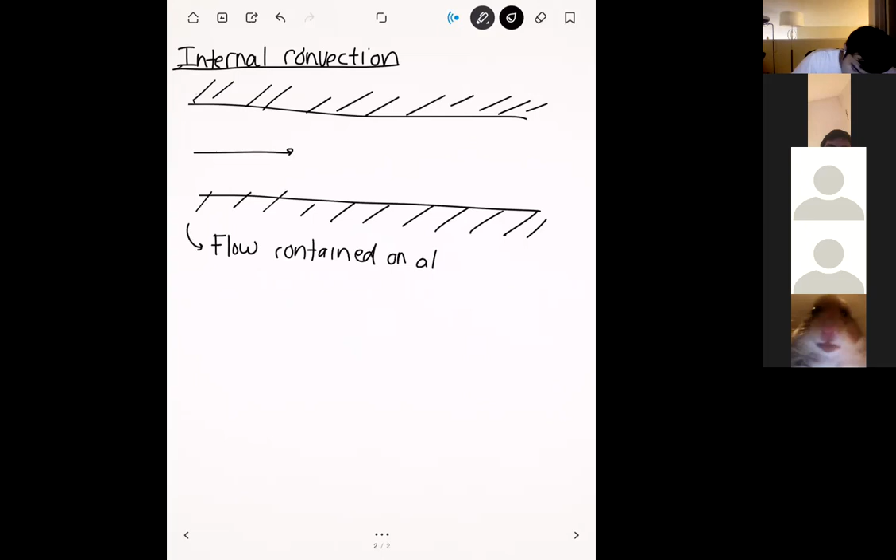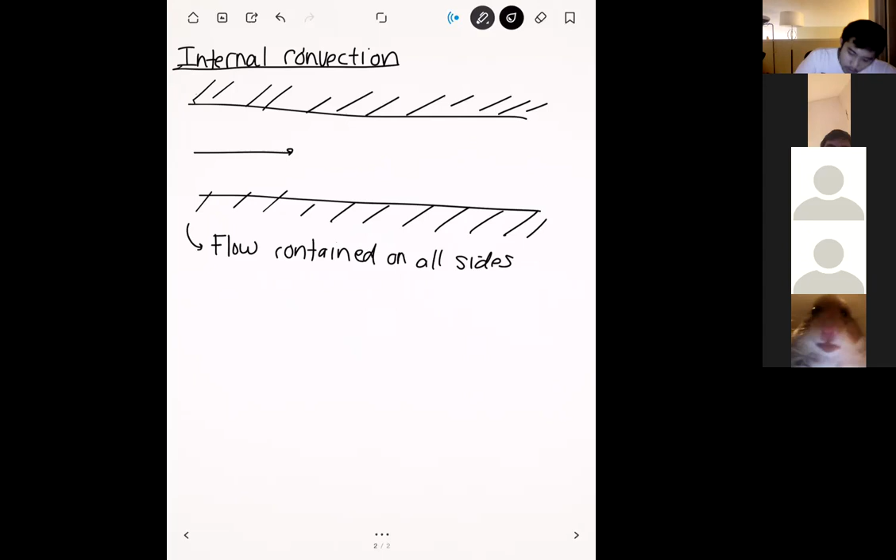And so the biggest difference that we saw is that when we're formulating our amount of convection heat transfer, we do it in terms of the mean temperature instead of the free stream, right? And so when we write out Newton's law of cooling, we have Q is equal to hA(Ts minus T infinity), right? And so this is what we usually have for convection, but what we said for internal convection was that instead of T infinity right here, what we have instead is Tm.

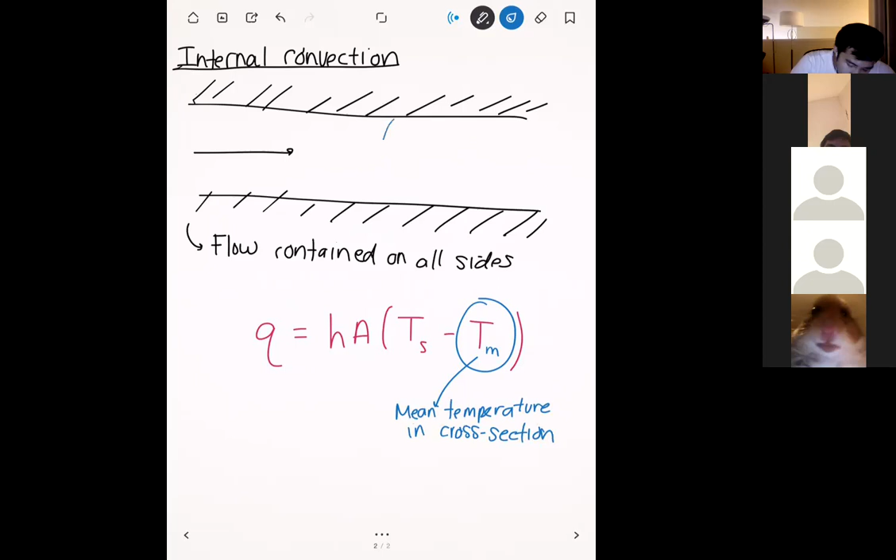Okay. And what's unique about this Tm is that this is basically the mean temperature in the cross section. Okay. And so basically what that means is that, say that we have a circular pipe here. And so if I draw kind of a cross section just like that, Tm would basically just be the average temperature across that cross section, okay?

And at first, this might just seem like just a notational change. And so instead of an infinity sign, what we have is an M. But what we said was that, because the flow is confined here, and because we have just a finite amount of fluid, this Tm is going to evolve going down the pipe. Or in other words, it's going to change. And the reason for that is because we have such a confined space, as heat gets exchanged between the fluid and the walls, right?

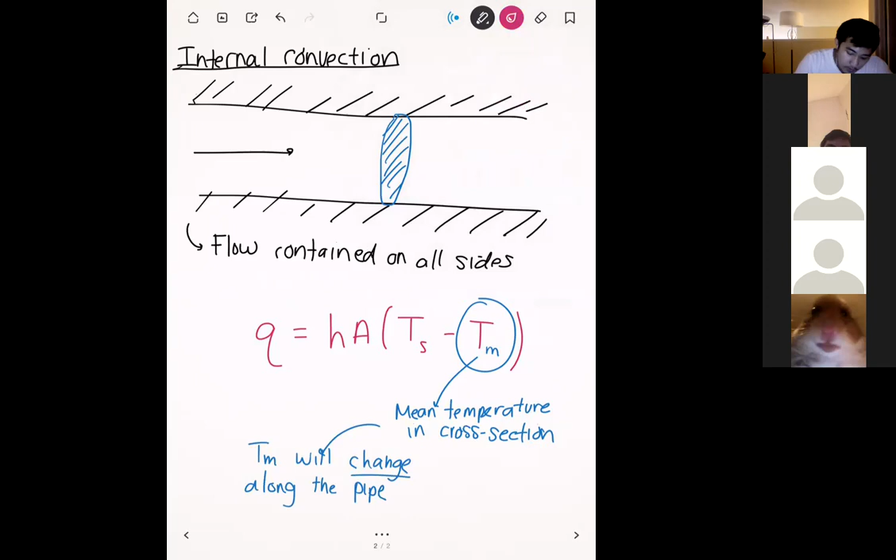So let's say that we have heat coming out here, okay? And so as heat is lost, that actually affects the overall internal energy of the system. And it's actually pretty significant because we have just a small amount of fluid there. And so the first thing we're going to do today is talk about a way that we can solve for expressions for Tm. And so what we are going to get are the mean temperatures as a function of x, where x is the direction down the length of the tube, okay?

And so basically what we'll see, and we'll have to apply some assumptions in order to solve for this, because it's a little bit difficult to solve otherwise, is that under some assumptions, we'll be able to solve for how the mean temperature changes along the length of the pipe. All right. And one last thing that I want to remind you of from last time is that even though our mean temperature here is changing, our convection coefficient h is actually going to be a constant. This point won't come up until later, but it's good to note it right now.

And so what you'll see later on is that our expressions for the Nusselt number are going to be extremely simple, a lot simpler than external convection. For internal convection, the difficulty is different than external convection, because for external convection, we had those sophisticated, complicated expressions for the Nusselt number. For internal convection, our Nusselt number correlations will be really simple, but the mean temperature will be a lot more difficult to calculate by comparison. Okay. Any questions on this? This is just kind of a recap from last time.

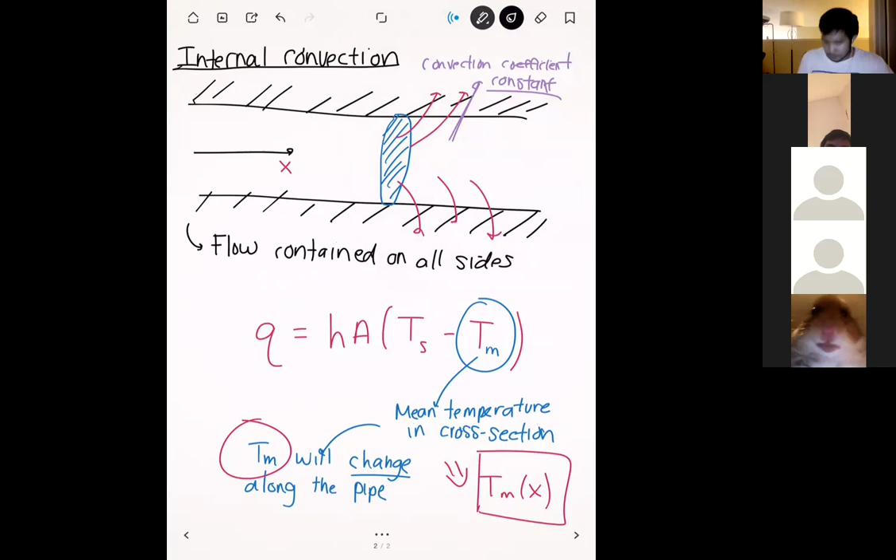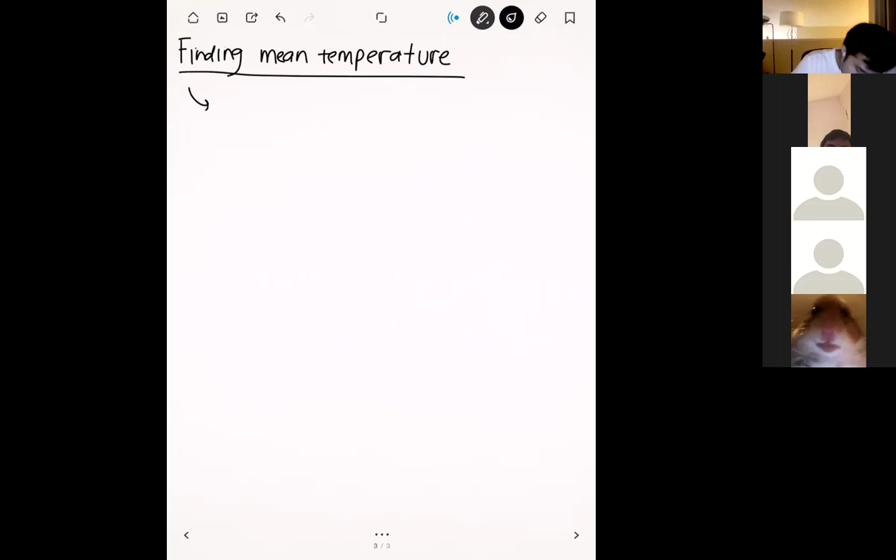Okay. All right. And so let's go about determining an expression for the mean temperature. Basically what we want to determine is an expression for Tm as a function of x. Or in other words, how the mean temperature evolves as we travel along the pipe.

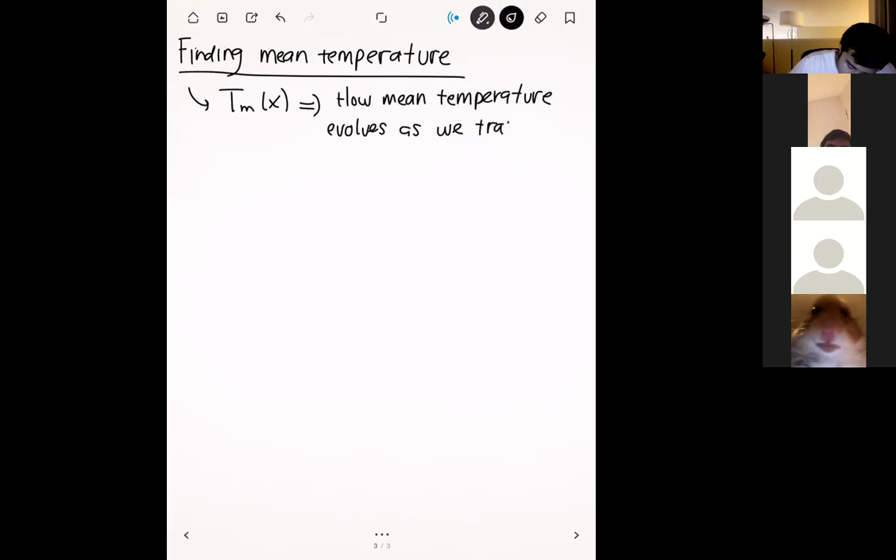Okay. And so for this, I'm going to do just a short derivation. Normally I don't like doing these, but this one's pretty short. So I'm going to draw a pipe that we usually have, and then let me draw a control volume, albeit a very tiny control volume. And so remember, control volumes are just tiny regions in space in which we can form our conservation laws. And so in this case we're going to form a conservation of energy on this tiny parcel of fluid.

Okay. And so let me define some things in this diagram here. So first thing we're going to have is, of course, since it's convection, we're going to have a flow of fluid down there. So our fluid's going to be moving. And the way I'm going to characterize that fluid is with m dot, where m dot right here is going to be the mass flow rate of the fluid going down a pipe.

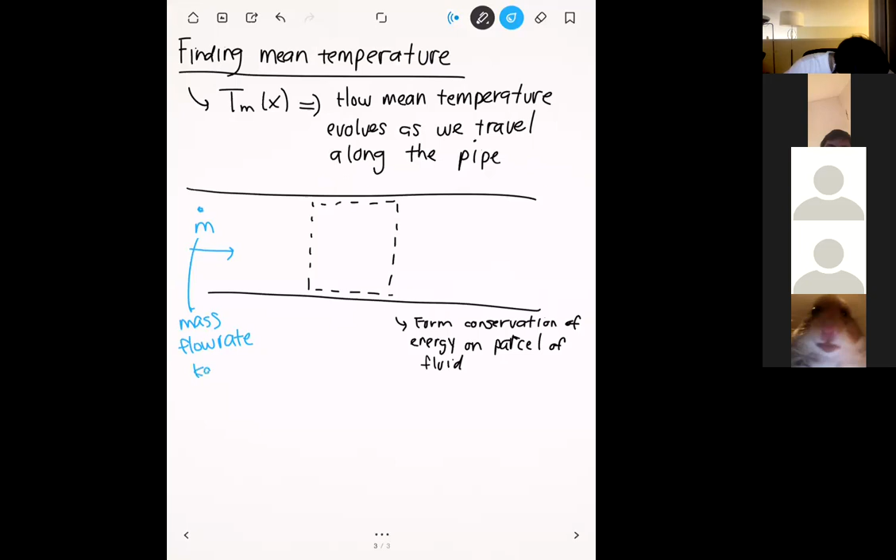Okay. And so the units for mass flow rate are going to be mass over time. And so typical SI units for this would be kilograms per second. Okay. I don't believe we've defined fluid flow in terms of mass flow rate before, so I wanted to make sure I define that.

All right. So let's define the amount of heat that's coming in. We'll assume that the only heat transfer that we're going to consider is from convection. And so let's assume that convection goes into the fluid. And I'll call that amount of convection heat transfer dq conv.

And so the last thing that we're going to need is the length of this parcel. So let's define this length right here to be dx. I'm using dq and dx here just to denote that this is a tiny parcel. So tiny that, I'm drawing it as a square here, but in reality it's something that's really, really small.

And so when we apply conservation of energy, basically what we're saying is that when we have convection heat transfer into this fluid, it's going to cause a change in the mean temperature of the fluid. You can think of it almost as, when we heat up this little parcel of fluid, its internal energy is going to go up. And so what we can form from this is an equivalence, right?

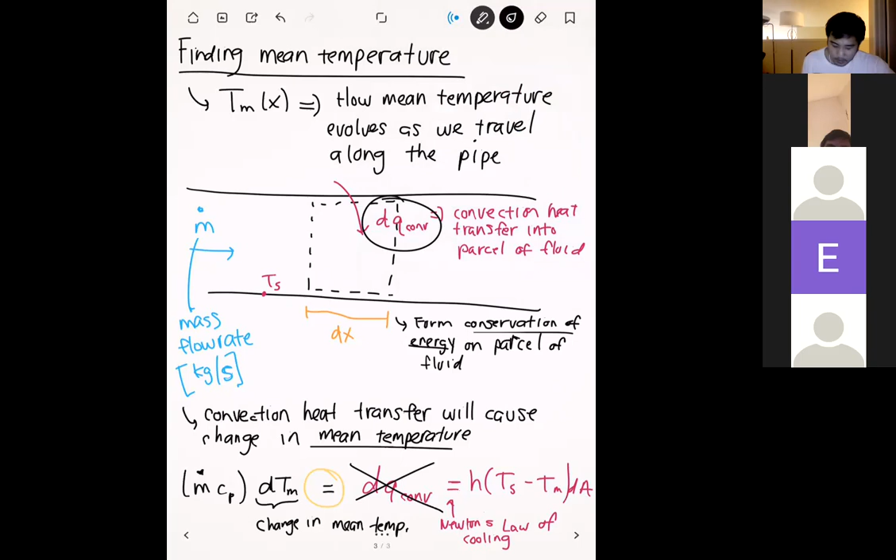All right. So let's work with just the leftmost expression here and the rightmost one. We're going to cut out the middleman and set this left-hand side equal to that right-hand side. So on one side of the equation, we have m dot Cp dTm is equal to h times Ts minus Tm times dA.

All right. And so from this expression, let's simplify dA a little bit. dA represents the surface area over our little parcel of fluid.

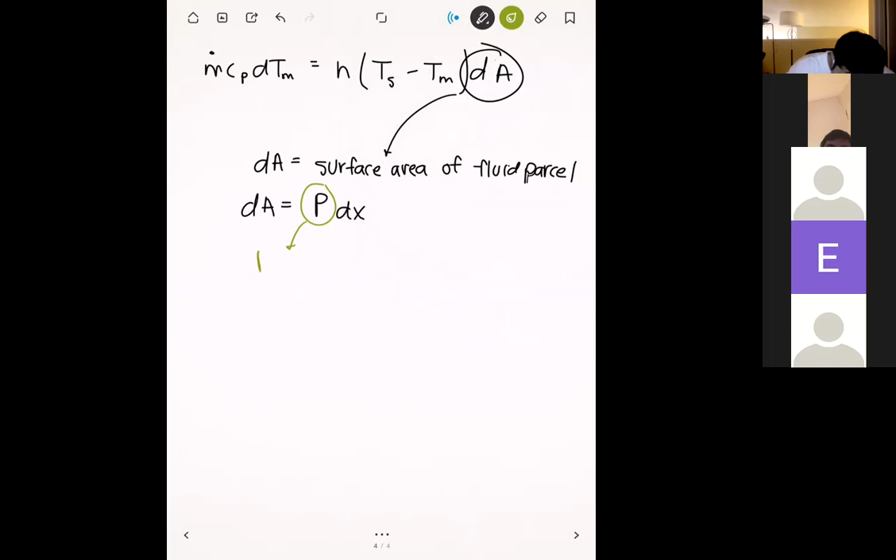And so another way that we can formulate this is we can say that dA is equal to P times dx, where P right here, hopefully this looks familiar from when we did our fin stuff. This P is just the perimeter around the parcel. And of course, dx is just the length of the fluid parcel. And so if we plug all that in, what we get is m dot Cp dTm is equal to H (Ts minus Tm) times P dx.

And then from here, what we can do is we can simplify this expression. We can do kind of like a pseudo derivative. I know this isn't how derivatives are born, but we'll suspend our imagination a little bit. The derivative stork fairy came, or whatever you want to say.

Okay, and so we'll divide both sides here by dx, and then we'll divide both sides by m dot Cp. So I'm going to take this whole expression, divide by dx times m dot Cp. And then what we get is kind of a deceptively simple differential equation here. The parcel is the box? Yes. So the parcel of fluid is basically just this box that I drew on the previous page. It's almost like an imaginary box that we're putting around a small parcel or a small amount of fluid.

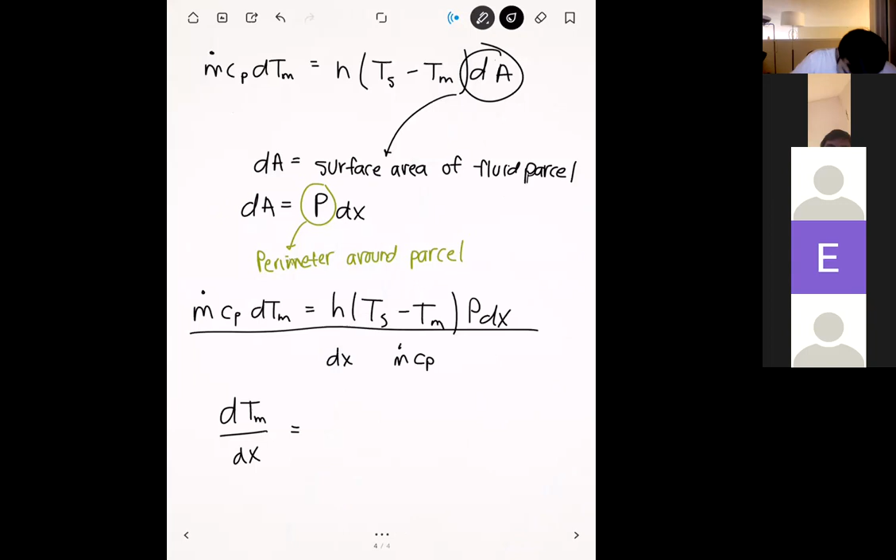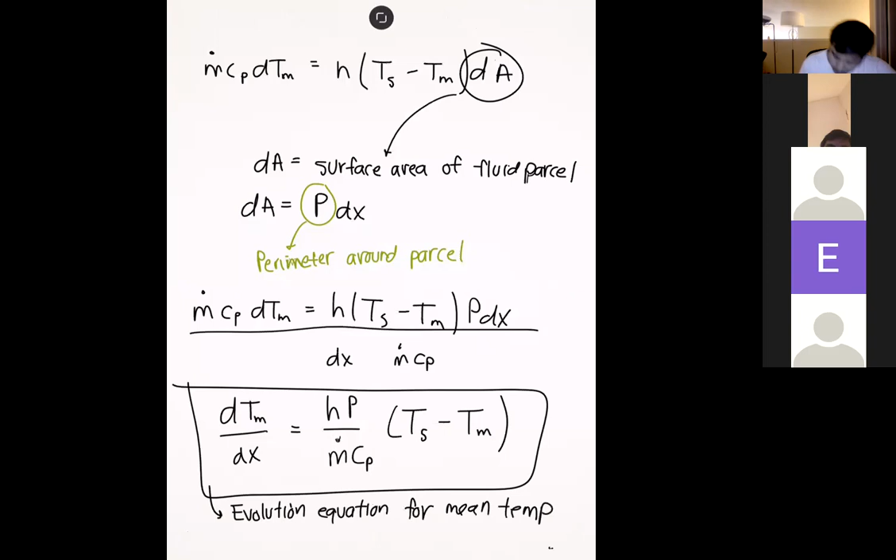And so we do that division and we end up with dTm/dx is equal to HP divided by m dot Cp times (Ts minus Tm). And so this equation right here, this is our evolution equation for the mean temperature. And so it looks not that bad. What we have is just a first order derivative, and on the right hand side, we have just some stuff there.

And so in order to solve for the mean temperature, all we have to do is solve this differential equation. But unfortunately, it's a lot easier said than done, because even though everything outside the parentheses, H, P, m dot, and Cp, are all constants, and we don't usually have to worry about those, what we have to worry about are these two: Ts and Tm. Remember, Ts is the temperature at the surface of our pipe, and Tm is our mean temperature that we're trying to solve for.

And so the reason this is more complicated than it seems is that Ts and Tm are both functions of x. So as we ride along in the pipe, both the mean temperature and the surface temperature are going to change. Since both are changing at the same time, we can't just straight up solve this equation for Tm. So we have to make some assumptions, and I'm going to show you how to solve this in two common situations that you'll find in practice. Any questions on this so far?

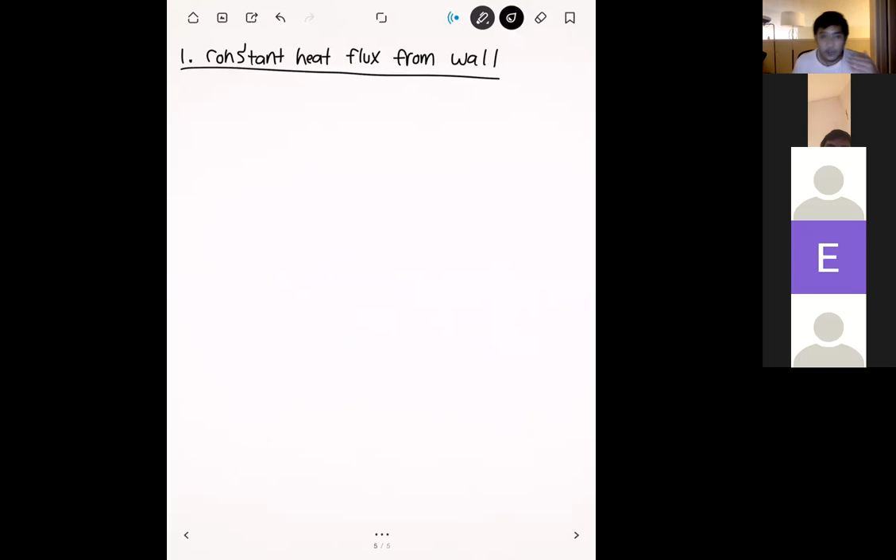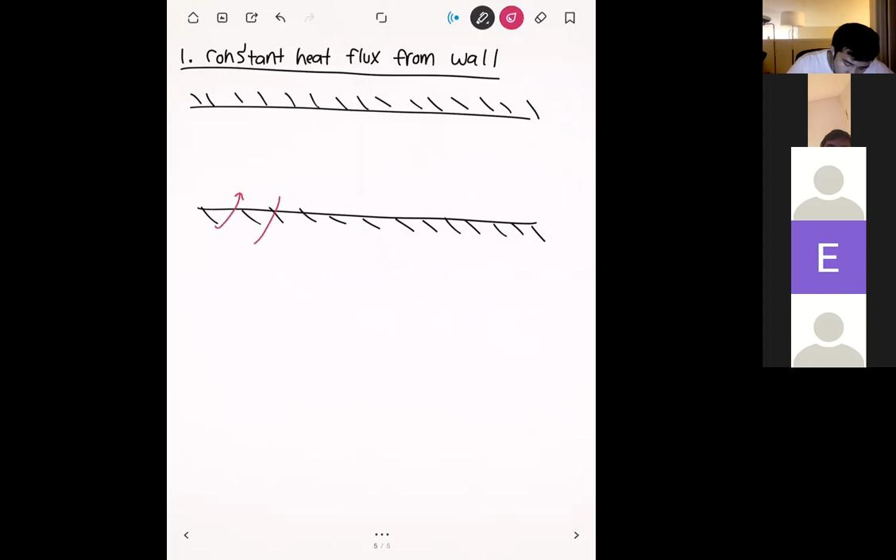All right, so let's go over some situations where we can actually solve this equation. The first situation is when we have constant heat flux coming from the wall. Physically, as we go along the vessel wall, we have a constant amount of heat transfer occurring from the wall. So we have our pipe right here, and if we measure the heat transfer coming from the wall into the fluid, it's going to be constant. All the red arrows represent the heat transfer from the walls into the fluid.

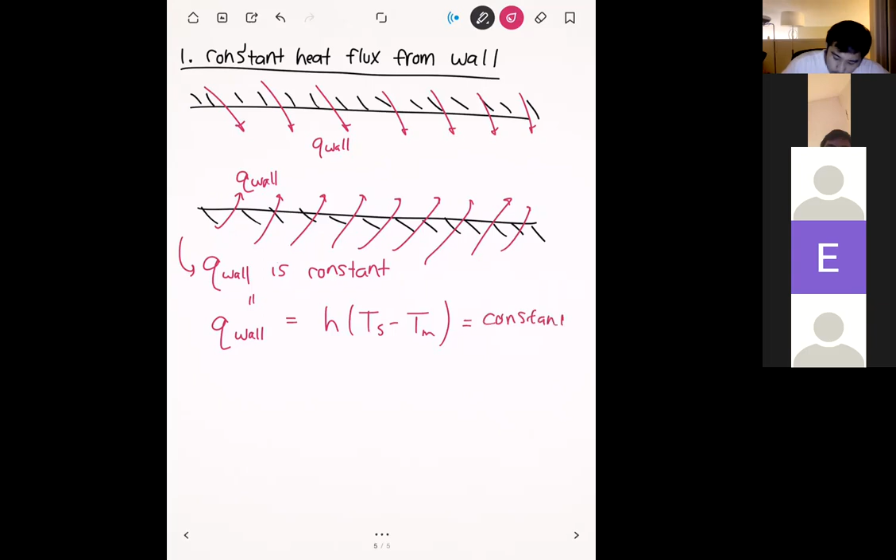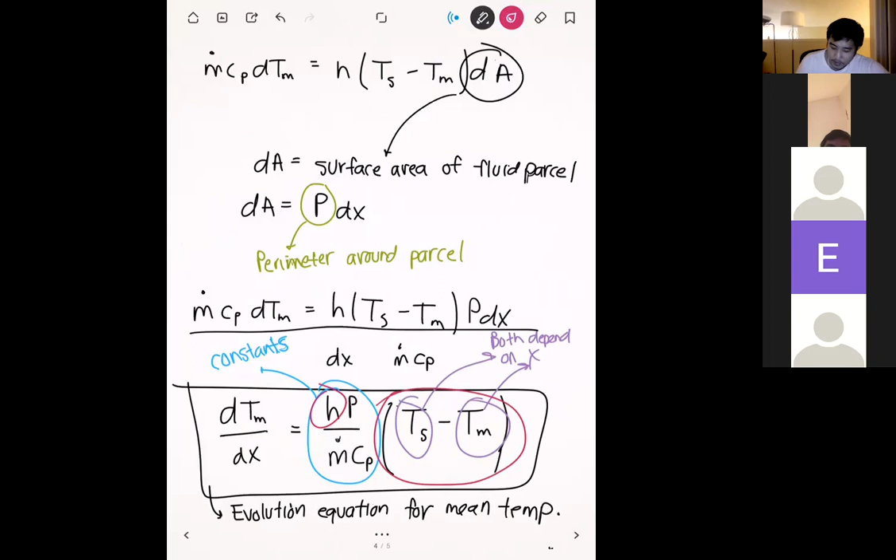And so in this situation, Q wall is constant. Another way we can express Q wall is in terms of the heat flux: it's equal to H times (Ts minus Tm), because that's just the convection heat transfer from the wall into the fluid in terms of flux. The area is missing because I put it in flux form, that's why I have the double primes. And this has to be constant under this assumption. So relating this back to our previous equation, we can take H times (Ts minus Tm) and set it equal to Q wall.

All right. And so if we plug that into our previous equation, what we have is dTm/dx is equal to P divided by m dot Cp. And if we plug in for h times (Ts minus Tm), then all we get there is just Q wall. Right.

And so at this point, what we have is just dTm/dx is equal to P, which is a constant, divided by m dot, which is a constant, divided by Cp, which is a constant, multiplied by Q wall double prime, which is a constant. And so this whole thing right here is just a constant. And so since this whole thing is a constant, we can just integrate both sides.

And so what we get is Tm of x is equal to P Q wall double prime divided by m dot Cp times x. And of course, because we're just performing an indefinite integral here, we have to add a constant. And that constant is just our constant of integration. And so for these kinds of equations, typically how we solve for this constant is we set it equal to the mean temperature at x is equal to 0.

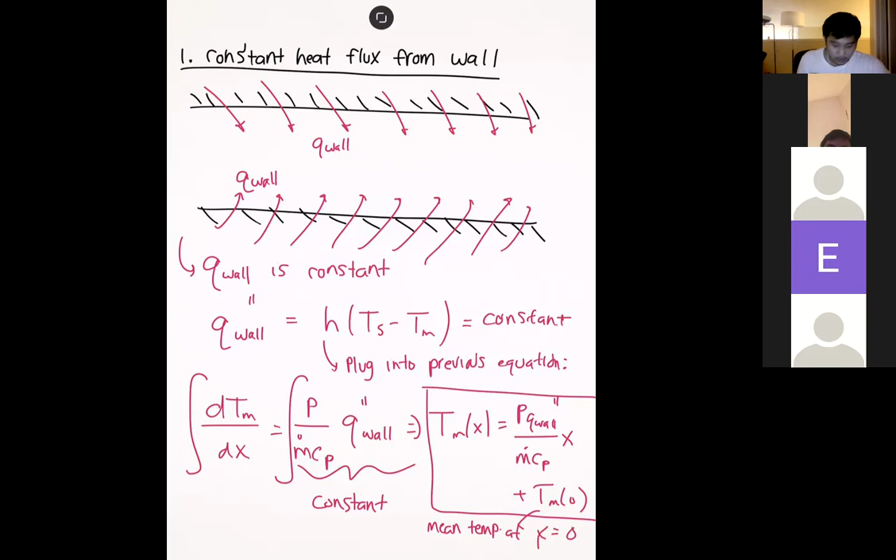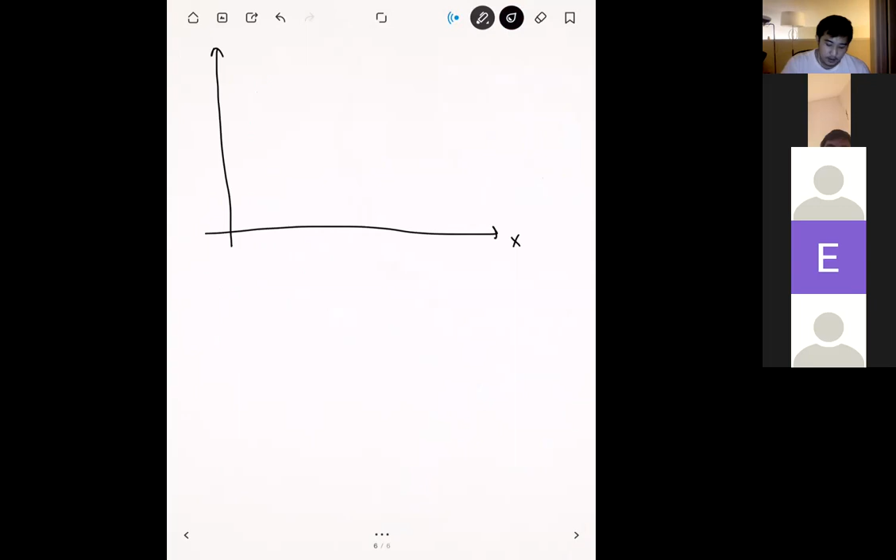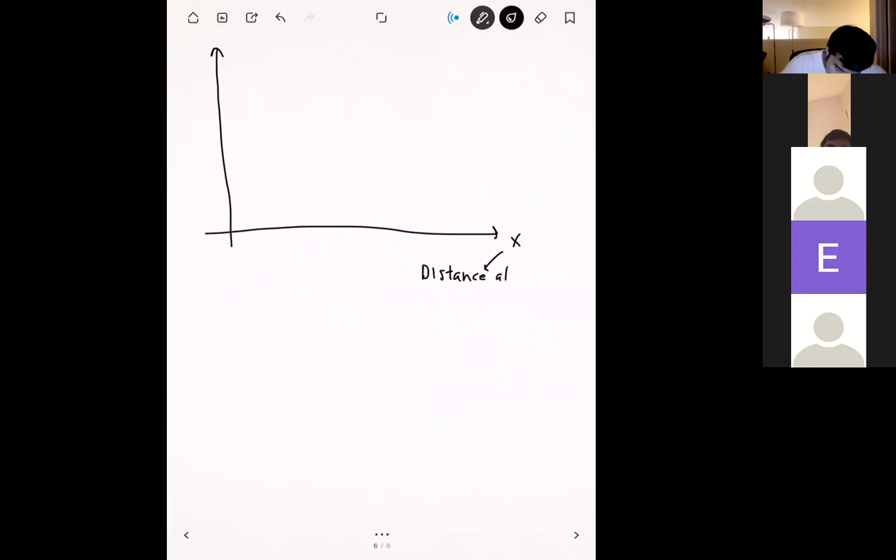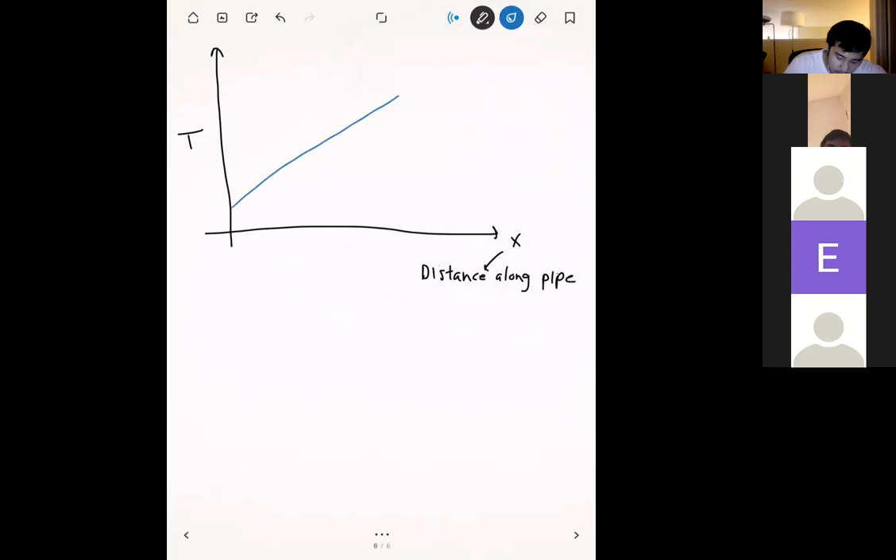All right, so let me just draw a quick graph for you to show you what it looks like, and then we'll do an example. Let's say that we have a graph here, and on the x-axis we have x, where x, remember, is our distance along the pipe. And on the y-axis we're going to have temperature. And so if our graph is linear, as a function of x, our mean temperature is just going to look like that. It's just going to keep linearly increasing.

Right. And then right alongside this, because our heat flux is constant, our surface temperature also has to go up as a function of x. And so our surface temperature usually looks something like this. It's usually right alongside Tm, and it has the exact same slope.

And so basically the difference between these two curves has to be the same all throughout, because that's what's going to give us our constant heat flux. And so even though we only solved the equation for Tm, just the fact that we have a constant heat flux also implies that Ts also increases linearly by that same rate. And the distance between those two depends on how much heat flux you have.

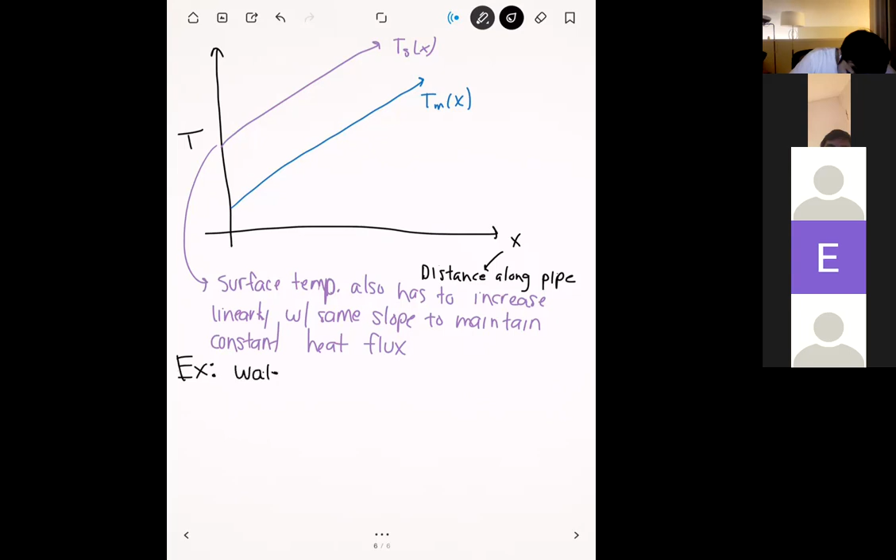Okay, and so let's do an example of this, just so you can see it in action. What you'll see from this is that, for cases where you can actually solve for the mean temperature, you can use that to solve for h as well. All right, so let's look at this example where we're going to look at a water heater. This water heater is going to be responsible for heating up water from 20 degrees C up to 60 degrees C.

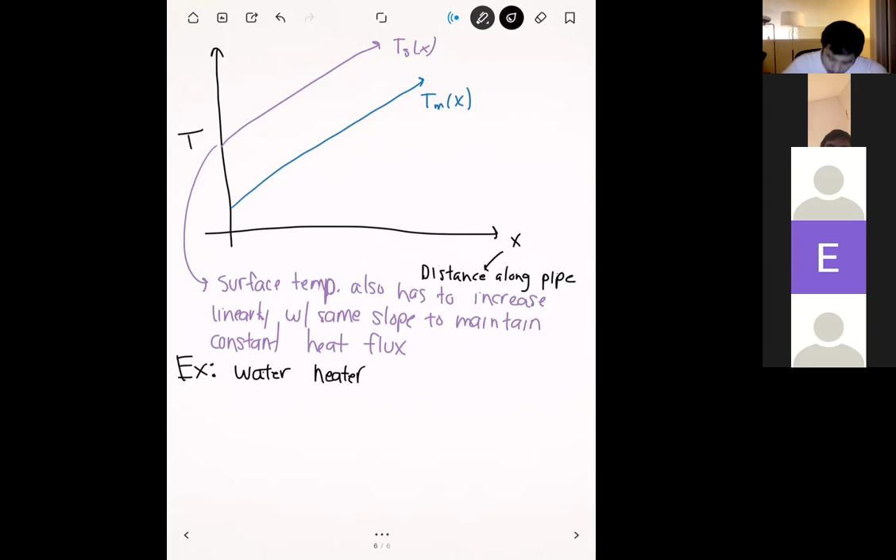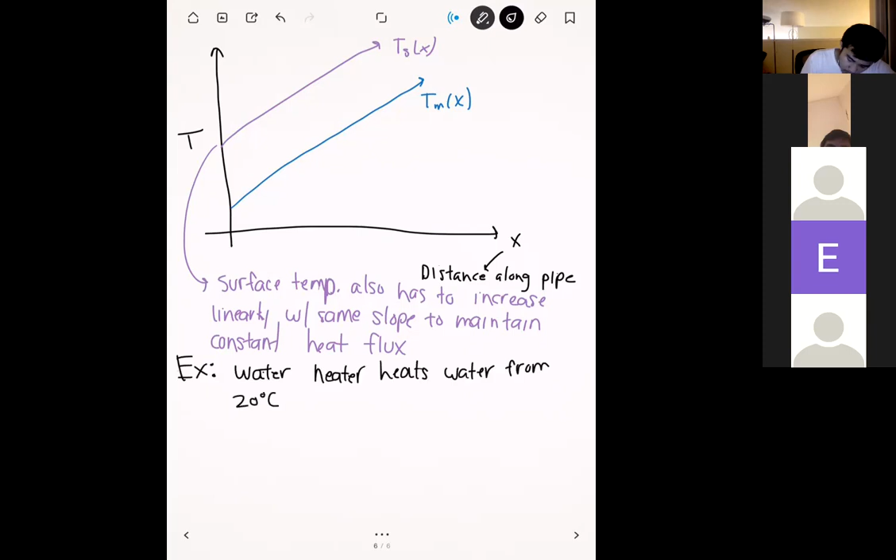And so schematically, it's going to look like this. I'm going to assume it's basically just one long pipe. On the left-hand side, which we'll call the inlet, we'll say that the mean temperature here is going to be 20 degrees C. And then by the outlet, or the end of the pipe, we're going to heat it up to 60 degrees C.

And so let's put some other stats in here. Let's say that we have a mass flow rate of 0.1 kilograms per second. That defines how much fluid is coming down. We're going to assume constant heat flux, and so the heat flux is going to have the following value. Let's assume that Q wall here is going to be 1.5 times 10 to the fourth watts per meter squared.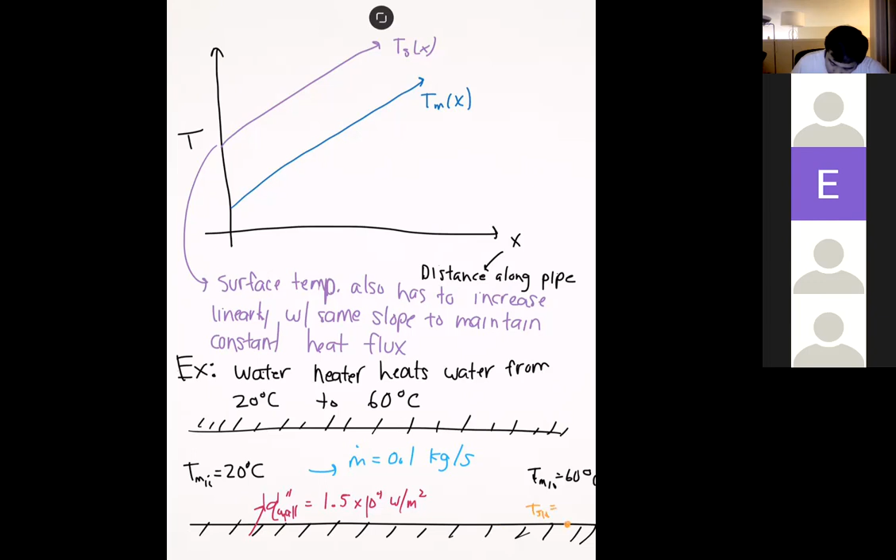Okay, and so that's going to be our Q wall. And then for part 2 of the problem, we also are going to assume that we know the surface temperature as well. Actually, let me draw this a bit more accurately. And so let's say that we know the surface temperature at the outlet. Okay, so we'll call that TSO, and then we'll say that this is 70 degrees C.

And then the last thing we need is just the tube diameter. And so let's say that the tube diameter here is going to be 20 millimeters. All right. And so under this configuration, let's solve for a few things. The first thing we're going to solve for is what is the length of the tube required in order to achieve these conditions. So we're basically going to be solving for the length of tubing.

And in part 2, we're actually going to use our solution from part 1 to solve for the convection coefficient H. Okay. All right. Any questions on the problem setup? Okay. All right. And so let's go ahead and start solving it. So part 1, what we want to solve for is the length of tubing required.

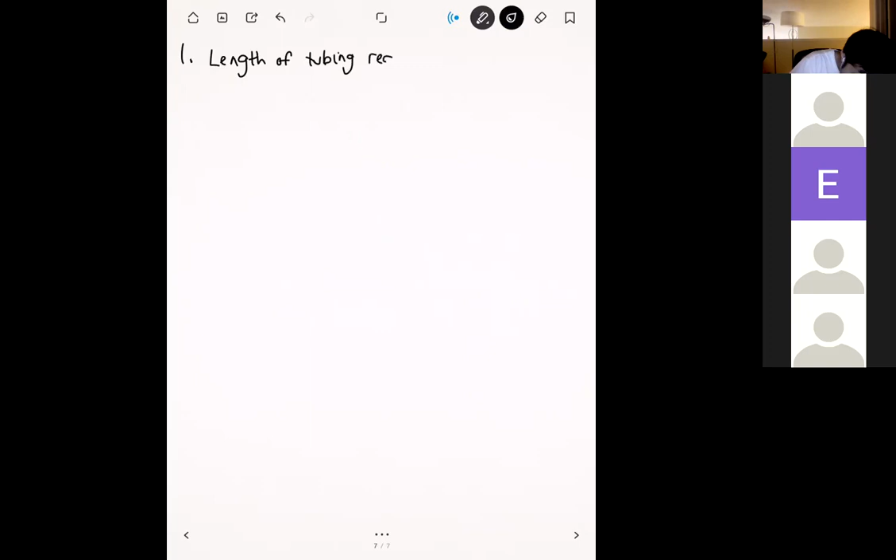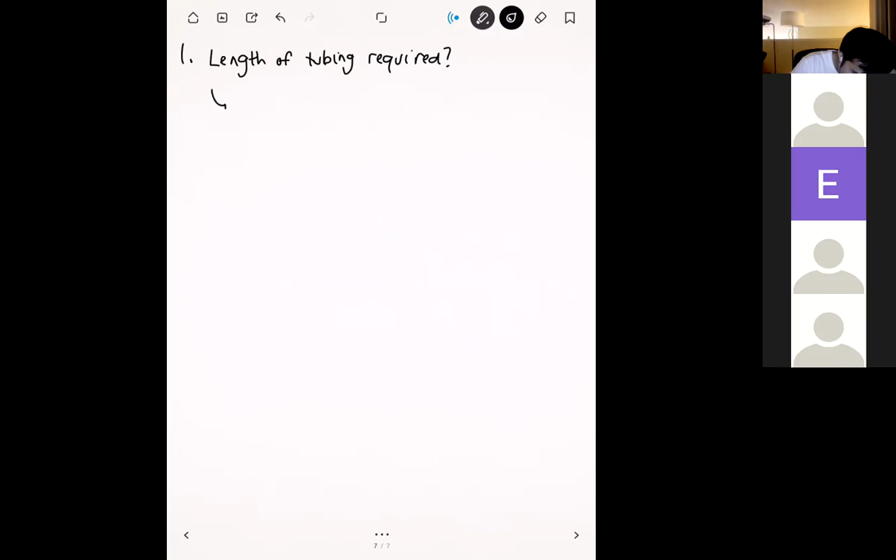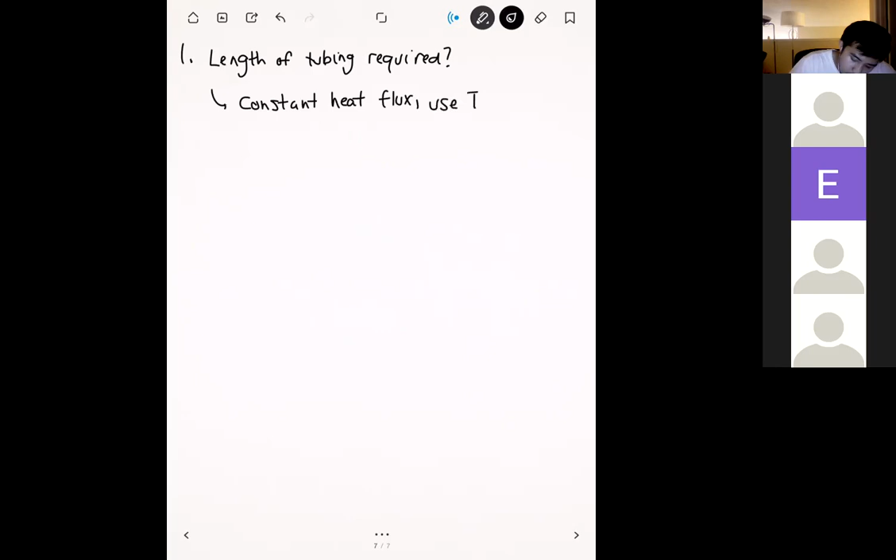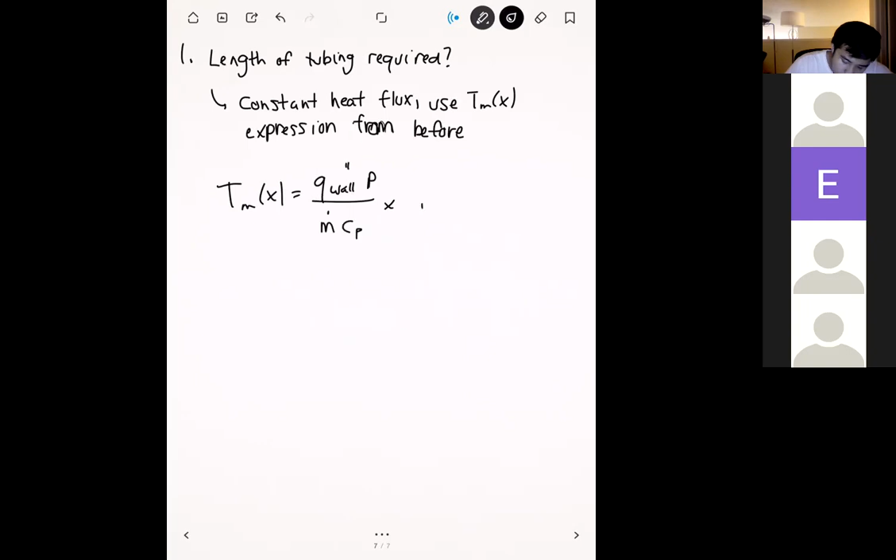Okay. And so in this case, since we have a constant heat flux, let's use our Tm expression from before. And so here we have Tm of x is equal to Q wall double prime times P divided by m dot Cp, times x, plus Tm of 0.

All right. And so in order to use this expression here, we need to look up the specific heat for water. Let's look this up in table A.6 in the book. And of course, remember, whenever you're evaluating properties in a table, you have to specify which temperature you're solving this at. And so in this case, just like we usually do for the film temperature, we take it as an average of our two temperature extremes.

And so our two temperature extremes here in the fluid are going to be 20 degrees C and 60 degrees C. And so our film temperature TF is just going to be the average between the two. So it'll be 20 plus 60 divided by 2 is equal to 40 degrees C. And so we're going to evaluate our properties at that. And then what we get is Cp is equal to 4,179 joules per kilogram K.

Okay. And so now we have everything that we need to plug into this formula. If we plug in for Q wall, which is given to us in the problem, perimeter, which we can easily compute from the diameter of the pipe, and m dot, which is of course given in the problem, what we get is Tm of x is equal to 2.255x plus Tm of 0. And so to get that 2.255, all I did was plug in the variables from the problem.

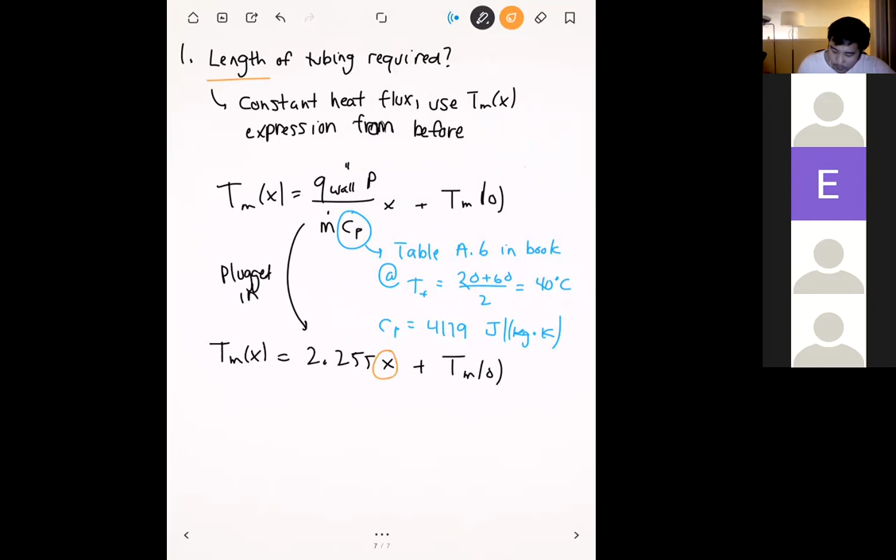All right. And so what we're solving for, remember, in this case is the length, right? And so ultimately we're going to solve for some x here. Before we do that, let's specify Tm of 0. Our Tm of 0 is just whatever the mean temperature is at the beginning of the pipe. In this case, the beginning of the pipe is at a temperature of 20 degrees C, because that's on the leftmost side.

And now that we set that to 20 degrees C, what we can do is set Tm of x equal to 60. And then we can solve for the x in order to make this happen. Because remember that x represents distance along the pipe. And so the x is basically going to be the length of tubing that we need to satisfy this requirement.

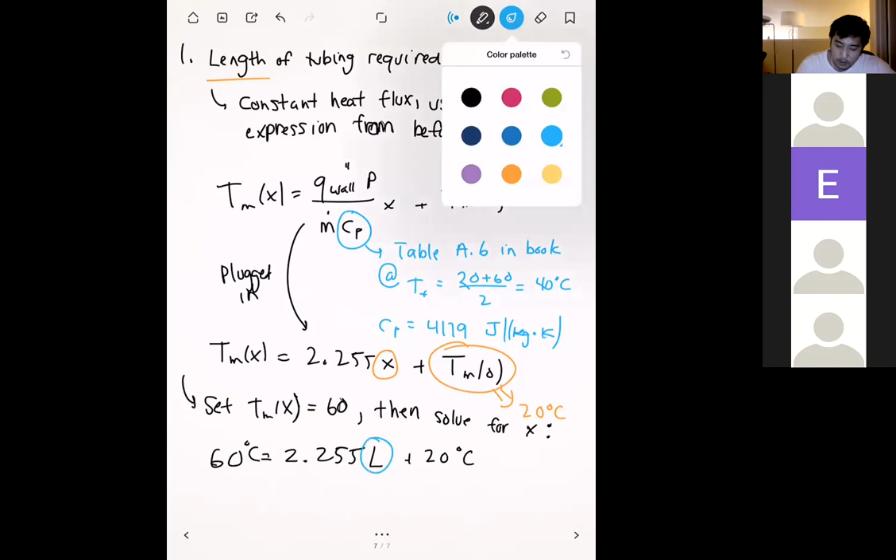All right. And so let's go ahead and do all that. For Tm of x, we're going to plug in 60. We have our 2.255, and since we're solving for a length, I'm going to change x to L. And all this is going to be added to 20 degrees C. Then from this expression, we can just solve for L. And so L is just going to be 60 minus 20 divided by 2.255. And what this gives us is 17.74 meters.

Right. That's a pretty long pipe. Under these conditions, basically, you need to have a pipe that's almost 18 meters long, so that's pretty big. All right. Any questions on how we did this part? Okay. All right. And so that's part one. And for part two of this problem, we want to solve for H.

All right. And so to do this, we're just going to use basically Newton's law of cooling, because we know what the mean temperature is, we know what the heat flux is, and we know what the surface temperature is. And so all we have to do is just plug this all in and solve for H. Okay.

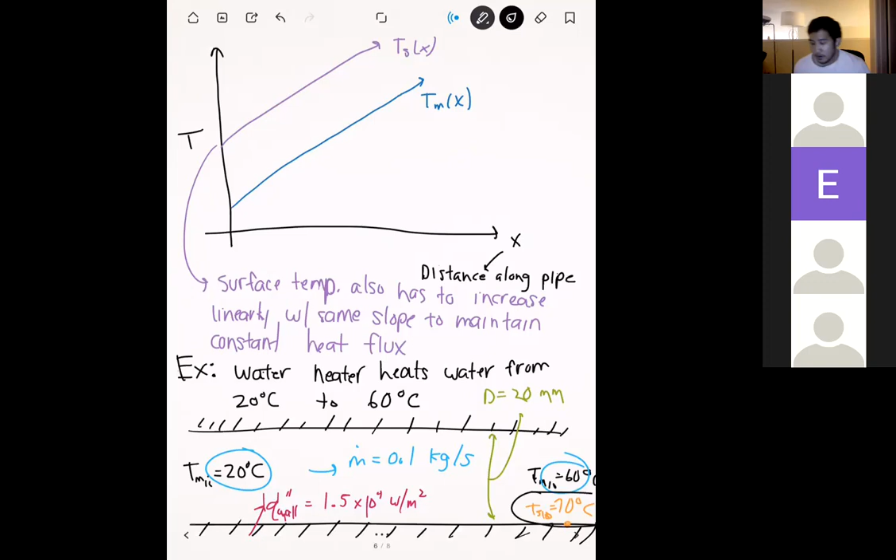And so we go ahead and plug all this in. We know that Q wall here is 1.5 times 10 to the 4th watts per meter square. Okay, and so all that's just from the problem. And then we have H, and then we have the surface temperature here at the outlet. And so from the problem, what I have written in orange right here is we said that the surface temperature at the outlet is going to be just 70 degrees C, right? So we have 70 degrees C minus the mean temperature at the outlet, which we know is 60 degrees C, right?

And so what we get from this is an H value equal to 70 minus 60 divided by 1.5 times 10 to the 4th, okay? And then what we get from that is, it's the reverse. So we have 1.5 times 10 to the 4th divided by 70 minus 60, okay? And then what we get from this is 1,500 watts per meter squared K.

And so basically we have an expression for H without having to go through the Nusselt numbers, which is nice. And so for the cases where you can solve for the mean temperature like this, you don't need to go and do a Nusselt number correlation at all. Okay. All right. Any questions on this example here?

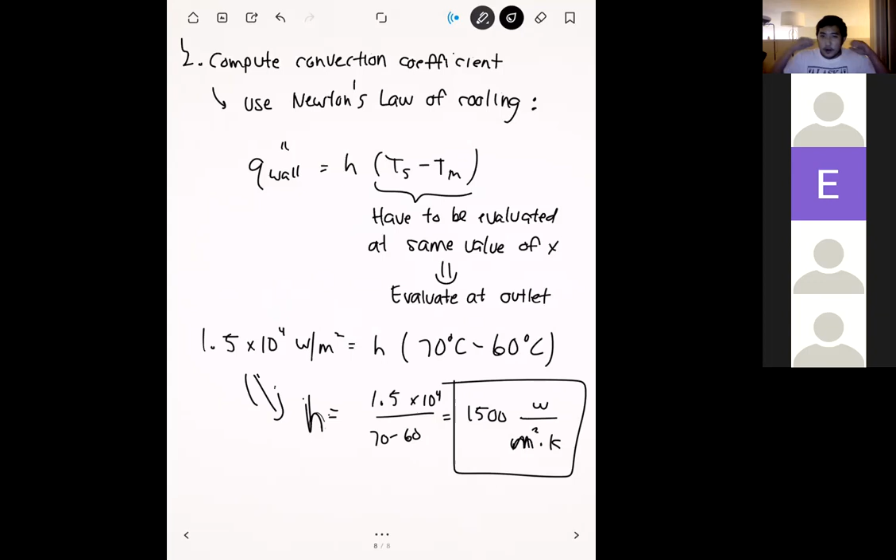My eyes are straining right now, so let me go turn on the light real quick. I understand why people do dark mode now. So I don't like turning this light on. This is a new light because it gets really hot, but my eyes are kind of straining looking at the screen. I've had a lot of people call me a madman for using light mode for all of my apps and all that stuff, but I can understand why now because my eyes are starting to hurt a little bit looking at these screens. Okay, so no questions on this problem.

Okay, and so let's go over the next situation where we can solve for the mean temperature now, which is constant surface temperature.

Turn on blue light filter. I'll have to give that a try next time. Yeah. I've also seen people wear like the gamer glasses, which are basically the yellow sunglasses things. Theoretically, I like the idea of that, but they're really expensive, which is way too much for that. You can find some cheap pairs, but personally, when I wear them, I don't know, they almost make my eyes hurt more. Oh dang, I see. I also wear glasses as well, so wearing two glasses at once kind of sucks. Oh, I see. Yeah, that makes sense. Yeah, it's always a difficult thing.

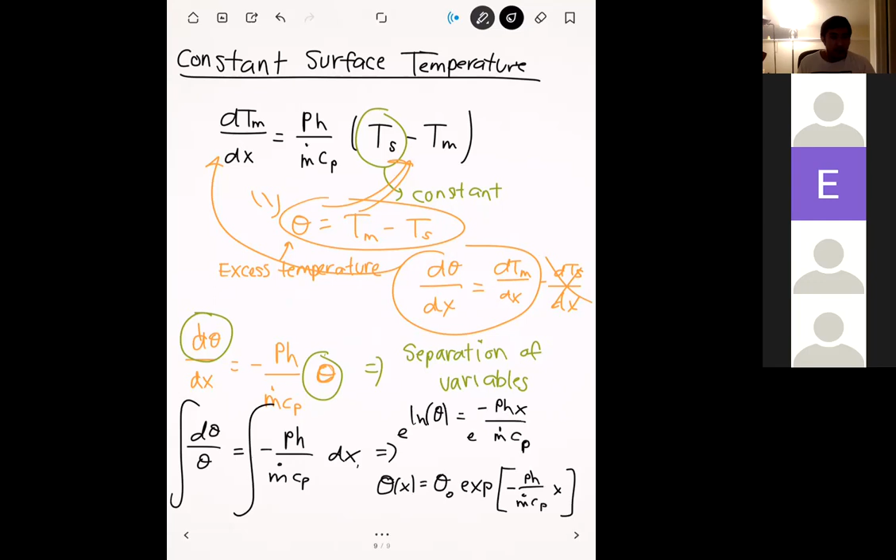Right. And so that's our expression here for the excess temperature, but we're going to take this one step further, and then we're going to turn this back into an expression for Tm of x, just because that's a little bit easier to work with in practice. Okay. Right. And so I'll do that on the next page. And so on the next page, I'll basically give you the formula that you can use for a constant surface temperature. Okay. All right. Any questions on this?

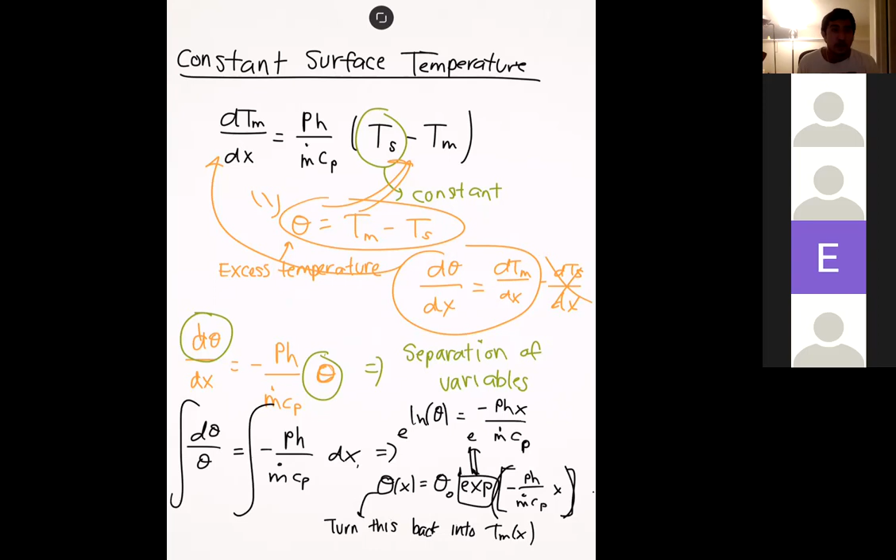Just specifying, you said that's all in the exponent, correct? Yes. Yeah. So I'm using this exp basically. Whenever you see this exp right here, what that means is that everything in the brackets next to it is e raised to. Gotcha. Okay. Thank you. Mm-hmm. Yeah, if you're using MATLAB too, there's no MATLAB in this class, but that's basically how you type in the code for exponential. You do exp and then parentheses, all of that stuff, and that does e raised to all of that power.

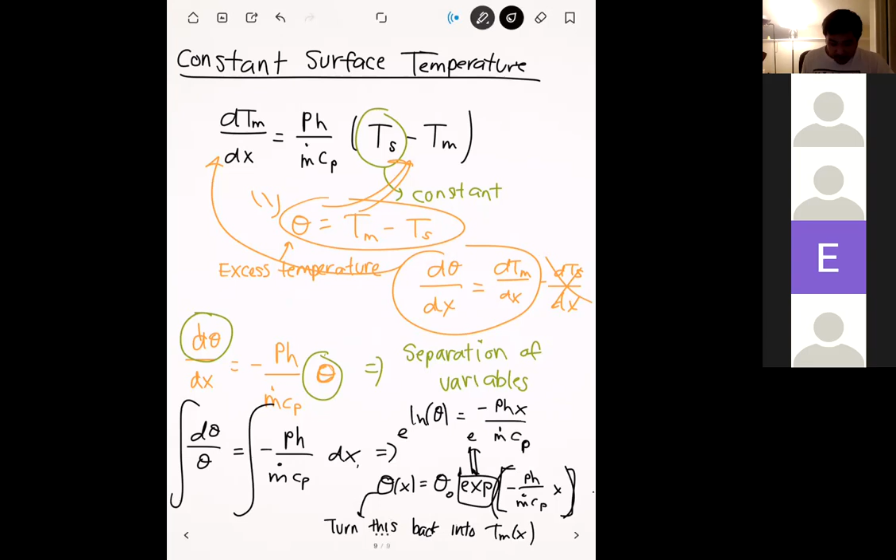Okay, and so let's go ahead and make the substitutions back. Because remember theta of x was equal to Tm of x minus Ts, which is a constant. Okay. And then theta naught, that was the constant that's out in front. This is our initial excess temperature at the beginning. And so the way we can express that is Tm of 0 minus Ts. And so this is our initial excess temperature.

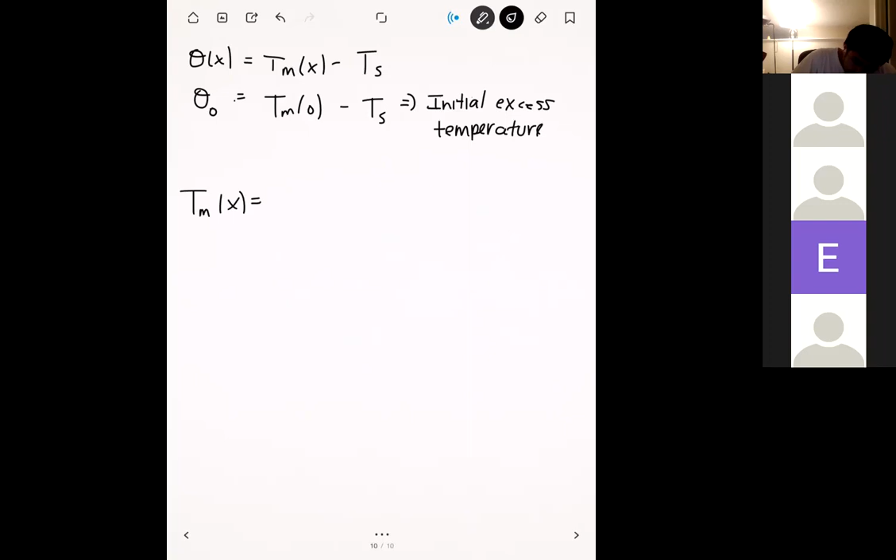All right, and so we make those substitutions back, and then what we get is Tm of x is equal to Tm of 0 minus Ts times exponential of minus Ph divided by m dot Cp x, plus Ts. Okay. And so this right here is our evolution of the mean temperature when we have a constant surface temperature. Okay.

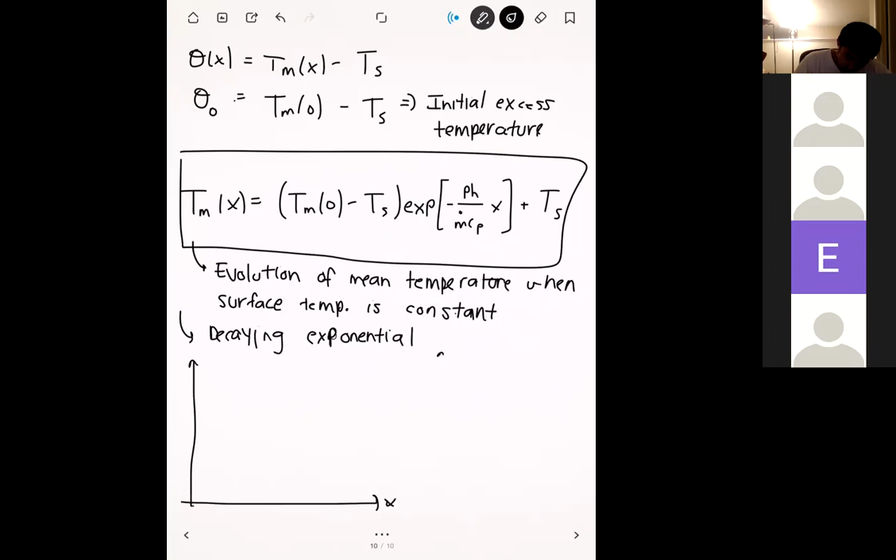All right. And so since this is a decaying exponential, our graphs are going to look kind of like the following. Right, and so the graphs look something like this. Okay. And so I'm going to draw you two cases here. Okay. And so there's a case where the fluid is being heated by the wall. Okay.

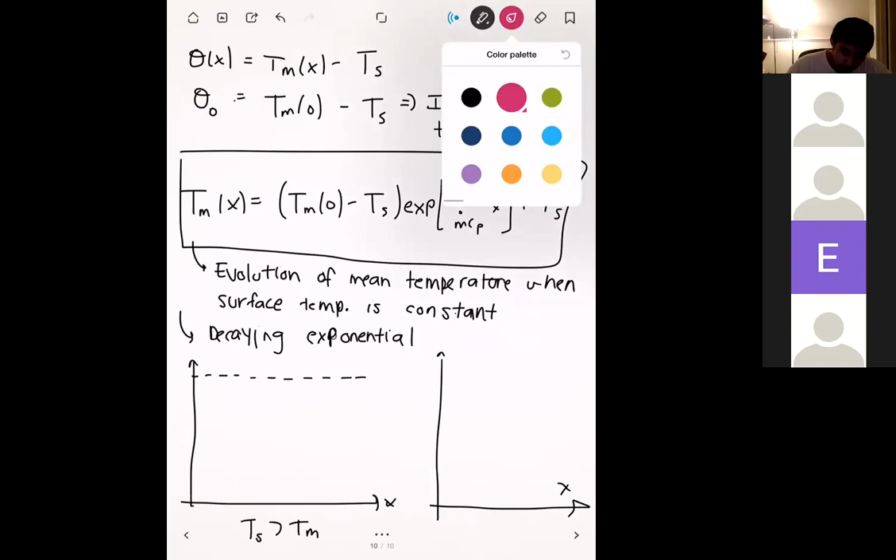And so basically in this case right here, Ts is greater than Tm, okay? And so the surface temperature is hotter than the fluid, and so the fluid is going to basically be heated, okay? And so this dotted line that I drew here, this is going to be Ts, which is a constant in this case, okay? And then our graph is going to look something like this. And so this is Tm of x.

Okay. And this is when fluid is being heated. Okay. And then conversely, for the other situation, we're going to assume that Ts is less than Tm. Okay. And so basically, we have a cooler surface than we have our fluid. Then our fluid is going to be cooled now.

Okay. And so on the bottom here, I have my dotted line, which is going to be Ts. And so our graph is going to look something like this. Okay, so fluid, in this case, is being cooled. Okay. And so it doesn't matter if the fluid's being heated or it's being cooled, you have this kind of decaying exponential relationship. Okay. Any questions on this?

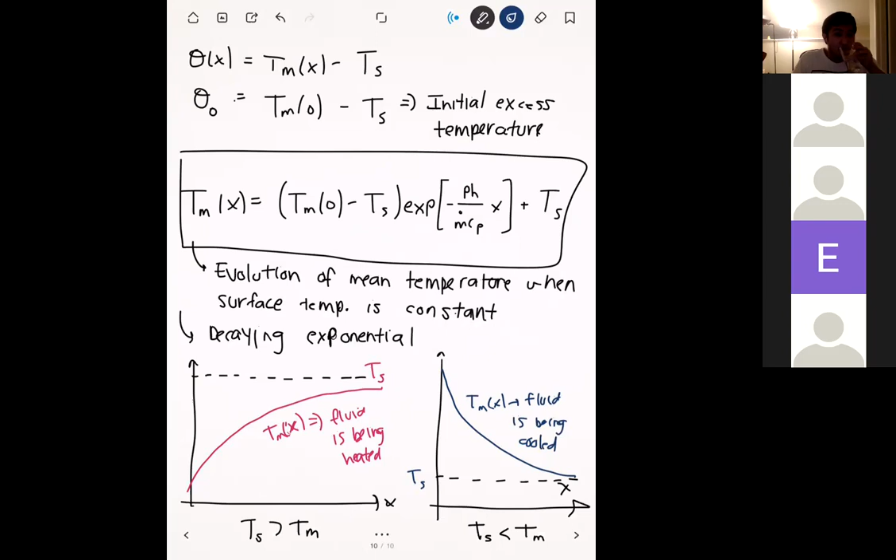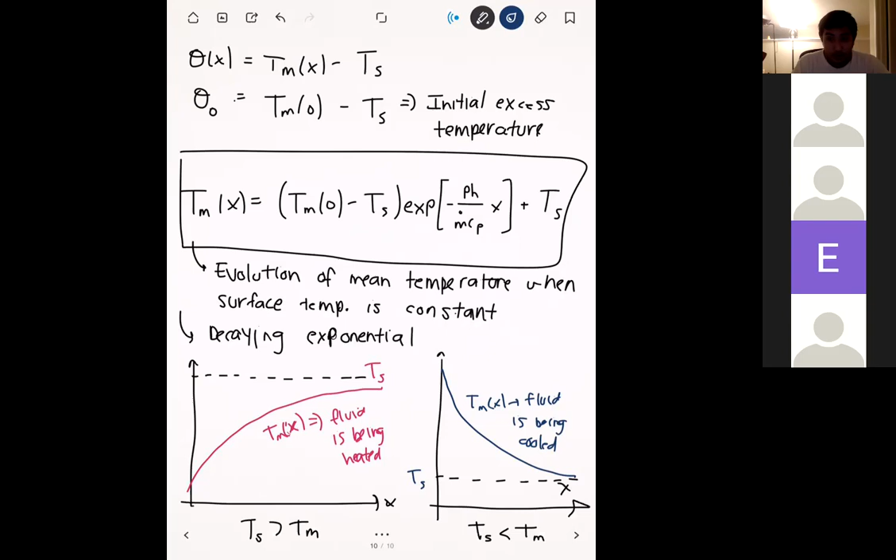All right, so I'll do an example with constant surface temperature a bit later, but there's one more thing that I wanted to cover before that, which was actually our Nusselt number correlations. Okay. All right, and so in order to do that, what we need to do is we need to solve for the temperature profile or the temperature distribution in the pipe.

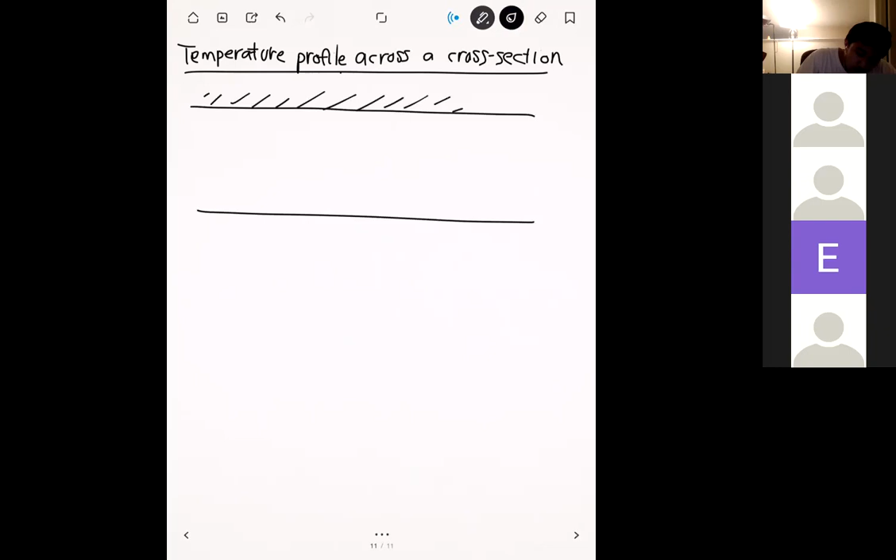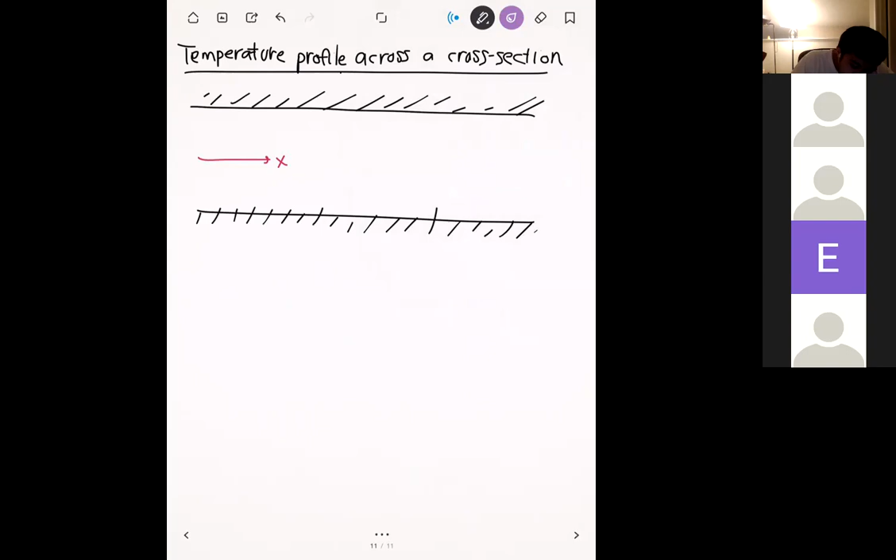In other words, what we want to find out is how the temperature actually varies in a cross section. Because so far what we solved for is how the temperature varies along the pipe. Right. So if I draw our pipe like this, okay. What we solved for so far is how the temperature varies in the x direction, or the x direction is basically down the length of the pipe. But in order to actually get an expression for the Nusselt number correlation, what we need is actually the temperature distribution in this direction, in purple, which is the r direction.

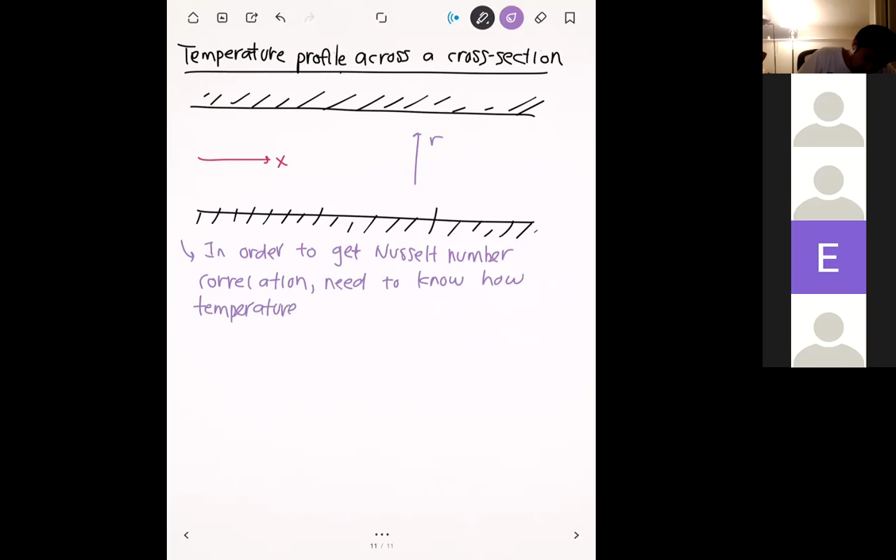Okay. And so from this basically we'll be able to compute, our goal is basically the derivative of the temperature distribution in the r direction. Because from this dT/dr, we can actually use this to solve for the Nusselt number correlation. So if you think all the way back, maybe 2 or 3 weeks ago, we had our first expression for the convection coefficient, which involved this derivative right here. And so by solving that, we can actually do that.

And for internal flows, relatively speaking, it's not that bad, but it's still pretty bad. And so I'll spare you all the gory details. And in case you're curious, I'll write out the equation that you can solve for from the book. I would never expect you to know this or to use it in a problem. But just to show you what it looks like, basically what you get is a fourth order equation. And so let me go ahead and write this out. But again, you don't actually need this for anything. Okay?

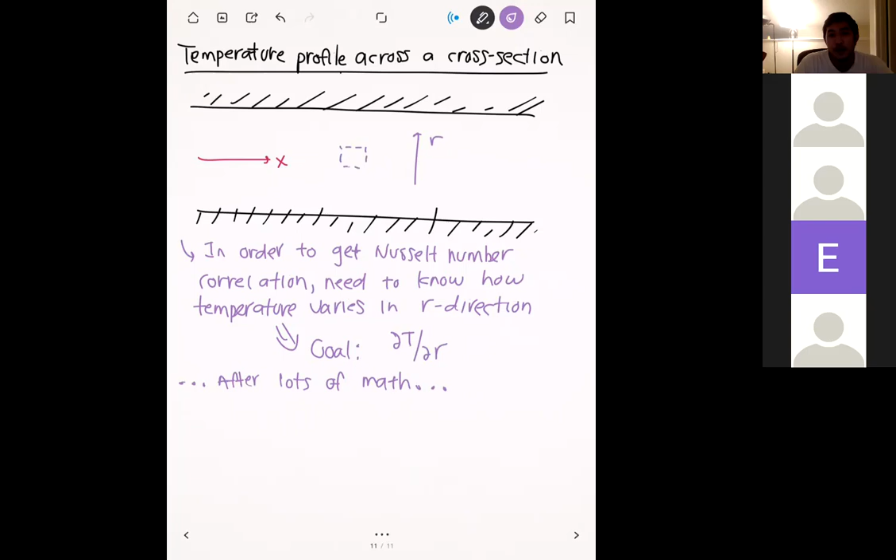And so actually, let me write this out. So after lots of math. Okay. And that math being more conservation of energy stuff. And so basically, the way the derivation goes is you draw a small parcel of fluid, just like before, and then you basically form conservation of energy here. But now instead of not only dx, we have a direction dr here as well.

And that makes things a little bit complicated and a little bit tough to get through in the last 15 minutes of class. Right? And so if you do all that stuff, you end up with the following expression. Okay. All right, so we get 2 um. So I'll write down everything first, and then I'll define all the terms. Okay, dT dx, dTm dx, I should say.

All right, times r squared over 4 minus r to the 4th divided by 16 ro squared minus 3 ro over 16. Okay. I think that should be an ro squared. Okay. Plus Ts. Okay. And so it's a lot of math to get to this point, and ultimately that stuff's not too important. But let me go ahead and define these terms for you here, just so you know what they are. Okay?

And so we use the subscript m to denote basically the same thing. And so this is basically the mean velocity across the cross section. Next, we have alpha. Remember, alpha here is our thermal diffusivity. Okay. dTm dx is the evolution of temperature in the x direction.

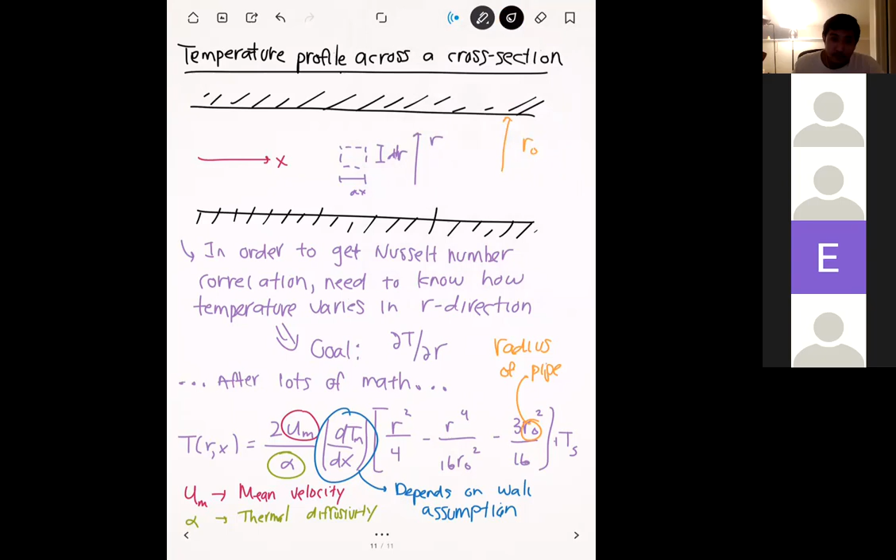And when I turn this page and I write them down, I guarantee that you'll probably not believe me that they're this simple, but they actually are. Right? Okay, so any questions on this? Okay. All right, and so before I give you the Nusselt number correlations, let me just remind you of something that we mentioned at the very beginning of class, which was, in internal flow, our convection coefficients and our Nusselt numbers are constant. Okay.

Under the condition that we have laminar flow. Okay. And if you remember, laminar flow for internal flow basically means our Reynolds number is less than 2300. And this is Reynolds number based on the diameter of the pipe. So we have a much lower Reynolds number threshold here. So if you're going to use these Nusselt number correlations, make sure that you're laminar, because there's a different Nusselt number correlation for turbulent flow, which we'll go over probably on Wednesday.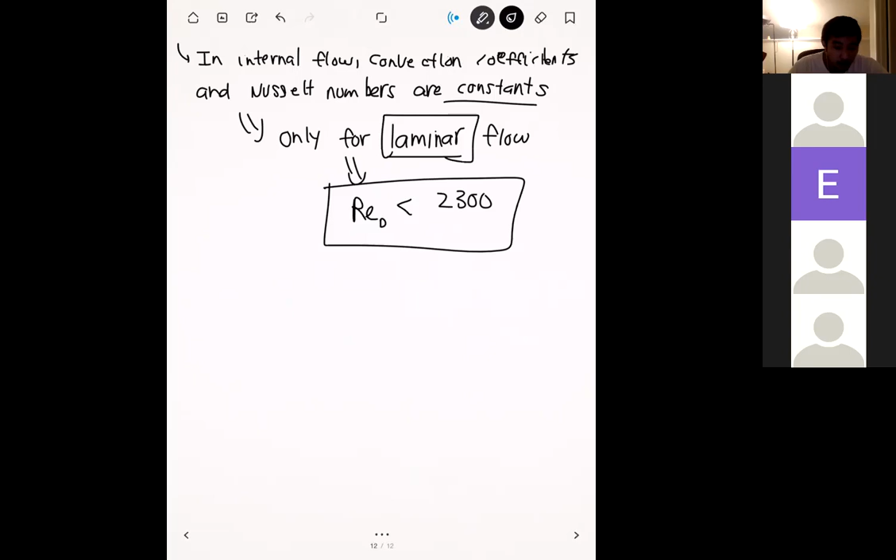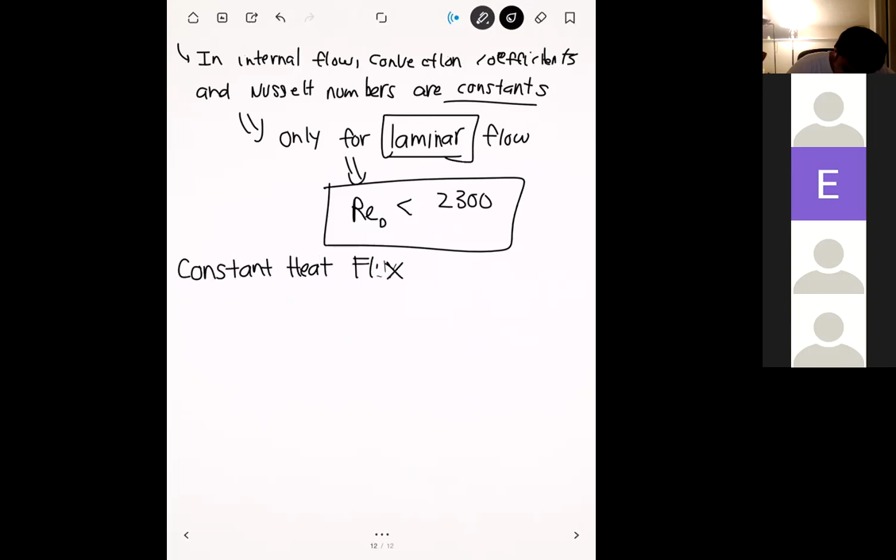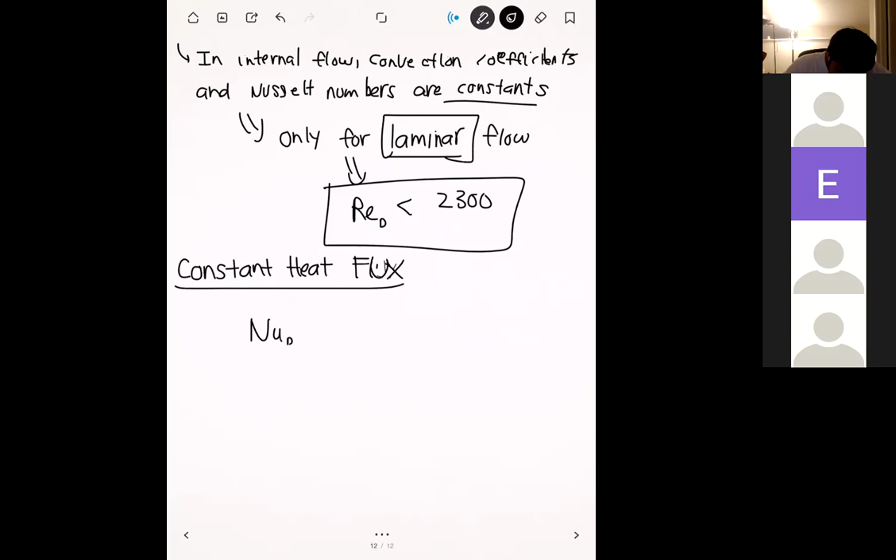Okay. And so if you can assume that you have laminar flow, we have two different Nusselt number correlations here. So one of them is going to be for constant heat flux. If you have constant heat flux and you have laminar flow, then the Nusselt number correlation is the following. We have NuD. Remember, Nu, our Nusselt number, is going to be h times D divided by kf. And if you have all these conditions met, the Nusselt number is equal to a magic number. And that magic number is 4.36. Okay.

And so it's kind of like the Hitchhiker's Guide to the Galaxy, which is the answer to everything. In this case, it's not 42, but it's 4.36, right? It's a very strange formula, and probably at this point, I know most of you guys are juniors or seniors, so you've seen all manner of really complicated, really sophisticated formulas, and so to have a formula just equal 4.36 is a little bit jarring, I'm sure, but that's what it is.

Okay? And so that's for constant surface flux, and our other condition, remember, was constant surface temperature. And for constant surface temperature, we have a very similar expression. For constant surface temperature, NuD, which again is equal to hD divided by kf, is equal to 3.66. Okay. All right. So very, very simple expressions.

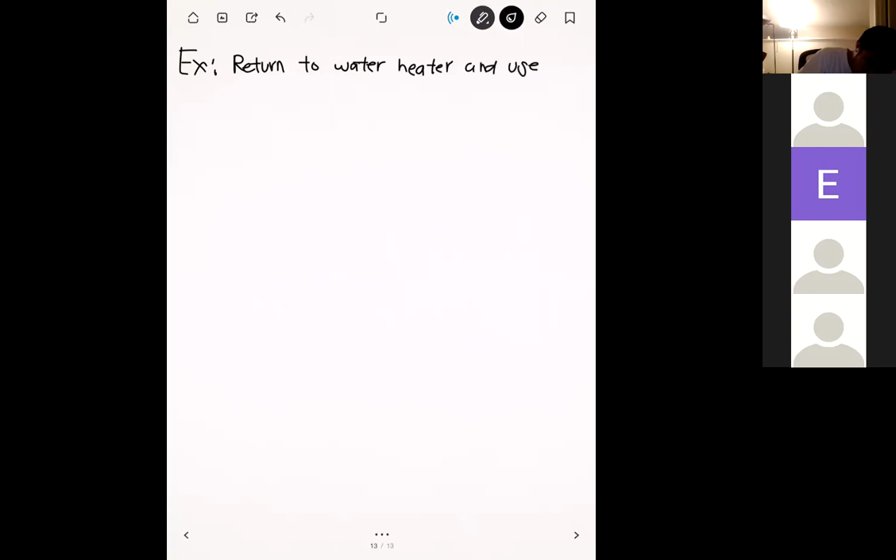Okay. So any questions on this before we apply this to an example? Actually, I'm going to apply this to the previous example that we did and show you how we can use it to compute h. So let's return to our water heater example and use this Nusselt number correlation to compute h. If you recall from the previous example, what we had was a case of constant surface flux, right, or constant heat flux.

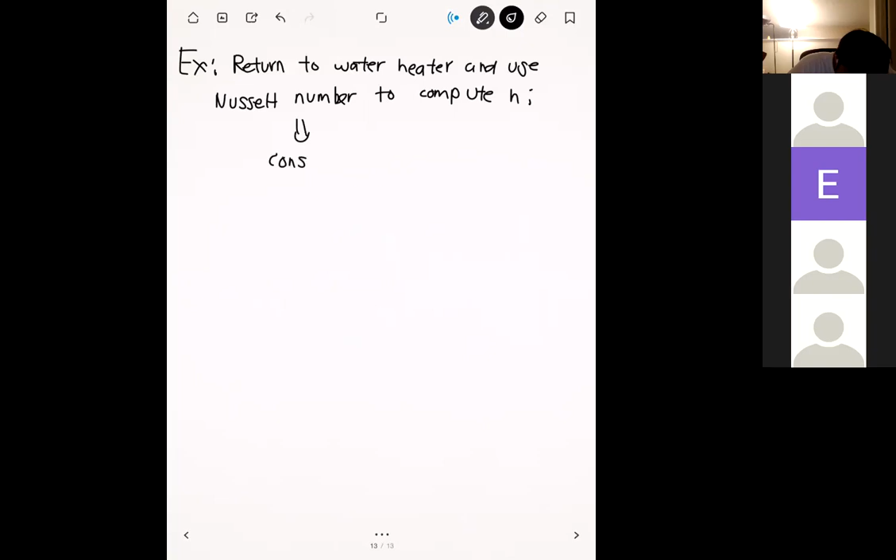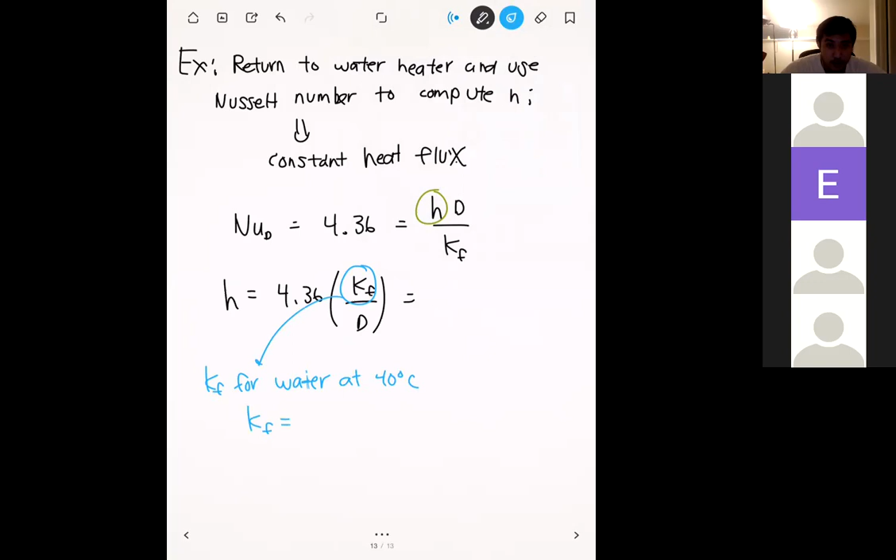And so under constant heat flux, we know that the Nusselt number is equal to 4.36. And this is equal to h times D divided by kf. We want to solve this equation for h, so let's multiply both sides by kf over D. What we get is h is equal to 4.36 times kf over D. To evaluate this, we need to plug in kf for water. Again, we're going to evaluate this at the temperature of 40 degrees. And what we get is kf is equal to 630 times 10 to the minus 3 watts per meter K. Oops.

Okay. And if you recall, our diameter was just 20 millimeters. Okay. And so we convert that to meters. We divide by 1,000, and so we have 0.02 meters. And then what we get from this is 137.34 watts per meter squared. Okay.

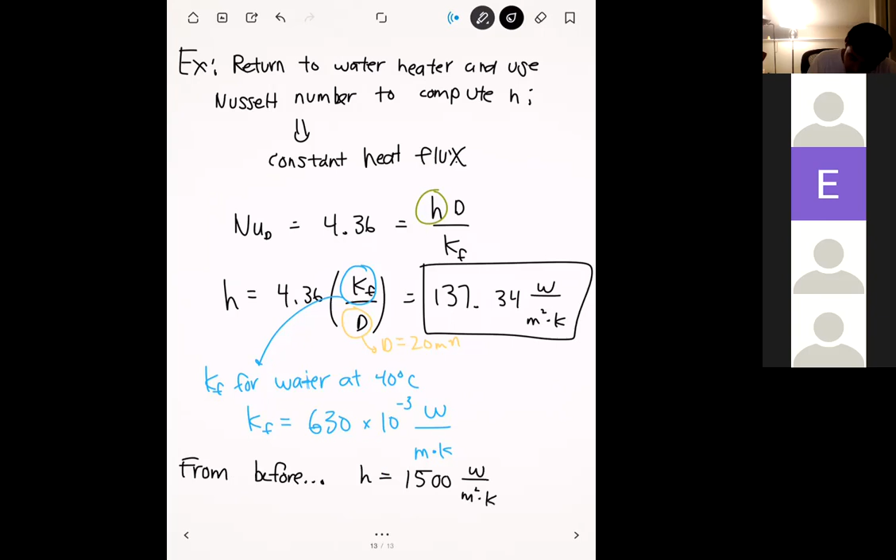And so a lot easier, relatively speaking, than a lot of convection problems. Okay. Right. But wait, if you're looking back at our previous example, what you saw was that the H that we previously found was not even close to this. Okay. And so from before, what we found from just the mean temperature equation was that H was actually equal to 1,500 watts per meter squared. And so these guys are not even close.

Right. And so what's the deal here? Someone must be messing with us here, because both methods here, both the Nusselt number method and the method where we use the mean temperature distribution, are valid, so how are we getting such different answers? And the reason is that, remember, in order to use this simple Nusselt number correlation, our big assumption was that our flow was laminar. Okay.

So if it doesn't match up, then it might be turbulent then? Exactly, yeah. And so in this case, because the H that we found from the mean temperature way was much higher, this probably means that our flow was turbulent. Okay. And what we know about turbulence is that when you have turbulent flow, you have a much higher Reynolds number, and you have all this chaotic mixing going on. And so that's going to lead you to a much higher H than for a laminar flow situation.

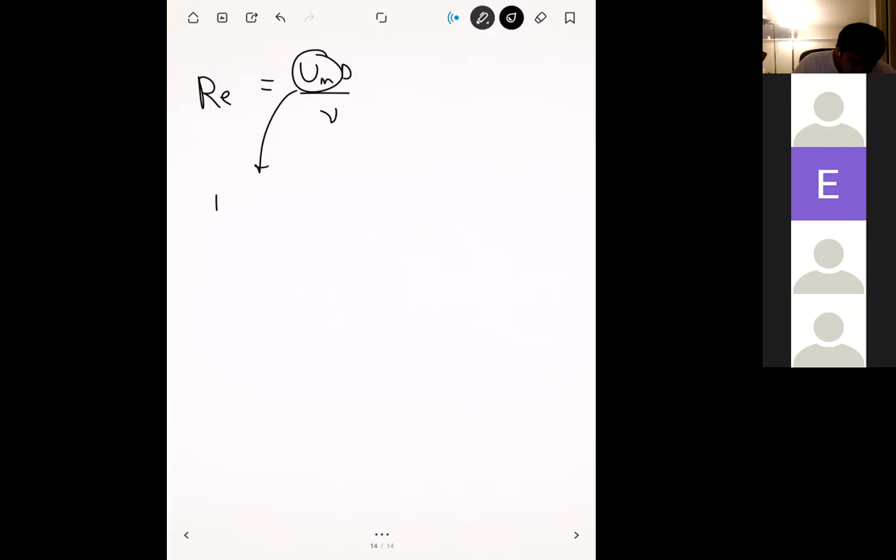Are you able to give us an example of a way to test if it was laminar? Or would it just be... Yeah, okay. So it would be just to compute the Reynolds number for this. I can do it really quick actually. So time's out, but remember Reynolds number is going to be the mean velocity times the diameter divided by viscosity. Well, actually, I don't have the viscosity of water. But basically, the way you can compute the mean velocity here is based off the mass flow rate, because we were given mass flow rate in the problem.

And so mass flow rate is equal to rho times u mean times A. Okay, and so you would solve for u mean, which would be m dot divided by rho A. And so you'd plug that back in there. You'd plug in the diameter, and then you plug in for the viscosity. And this has to be less than 2300 in order for you to use the simple Nusselt number correlation. And if you plug in everything from the previous problem, what you'll probably find is that this Reynolds number is much higher than 2300.

But I don't have the viscosity of water at 40 degrees C in front of me, and I also don't have my calculator right now. So if you want to verify that yourself, you're definitely welcome to do so. But when we pick this up on Wednesday, I'm going to pick it up basically from here. Okay. Thank you, Professor.

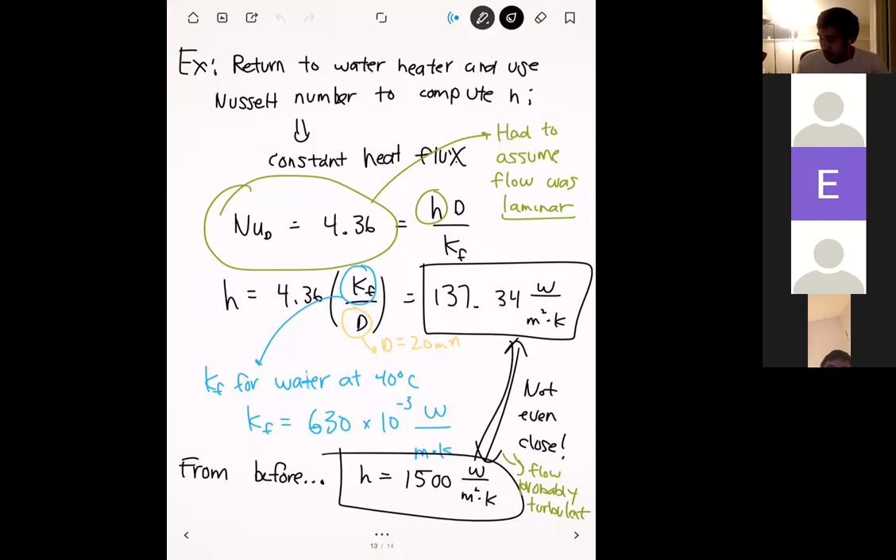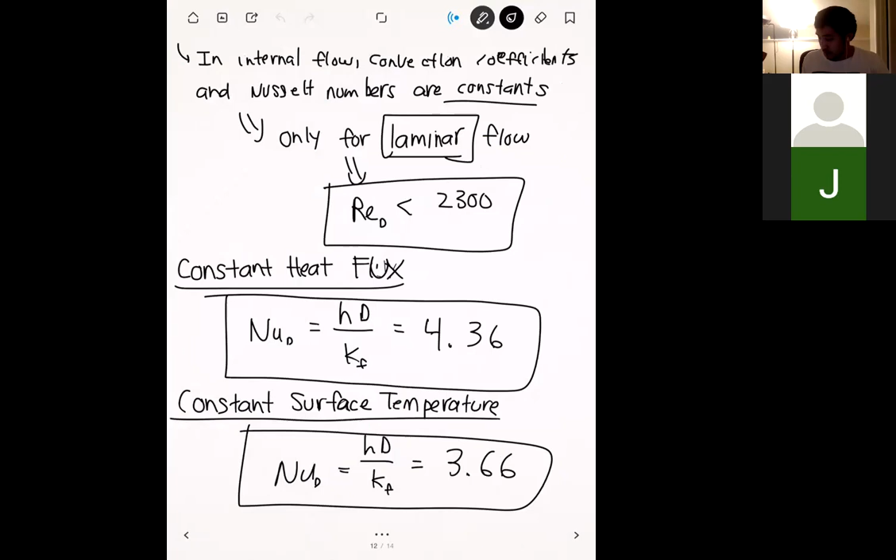Professor, could you go one page before that? Yep. One more page, actually. Yep. Okay, thank you. Have a great day. You too.

Nice. Yeah, they're up against like a 14 seed today, right? I mean, they pulled off a big upset too. Thanks. See you Wednesday.